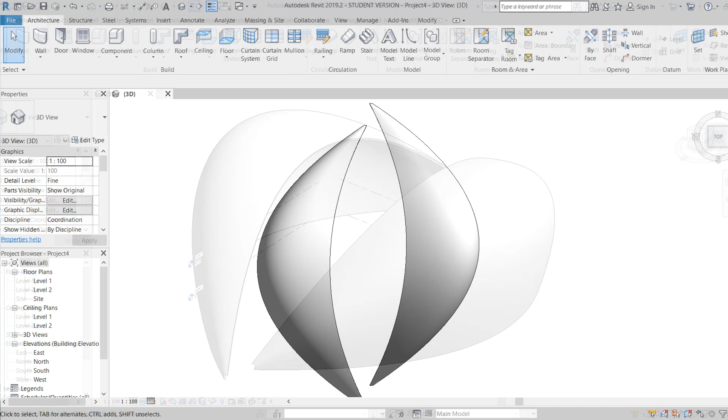The first thing I will do here is to open a new project. To do that, I go into the model and there is a new option here, and I just choose this default metric, so that is the millimeter template.

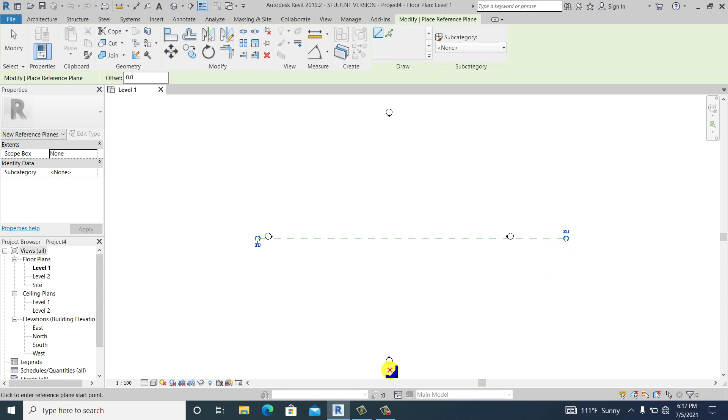Now what I'm going to do here is to set first my reference plane. In order to do that, RP for the shortcut. This is my guide and I name it into 1 just in case I need it, and this is 2.

Because this is an elliptical shape, I use the Massing & Site to model that one. So I just go into Massing & Site, show mass, select that one.

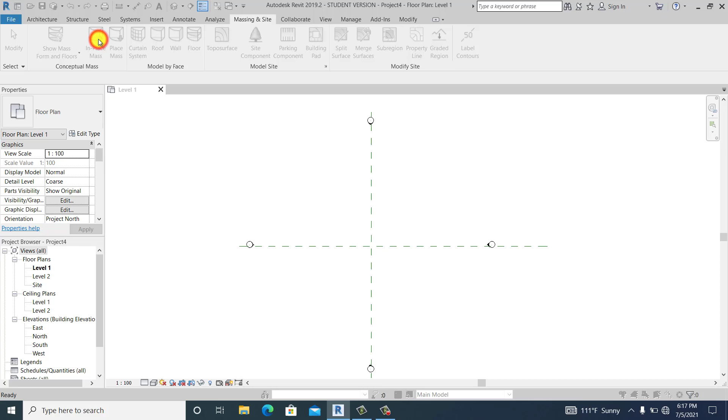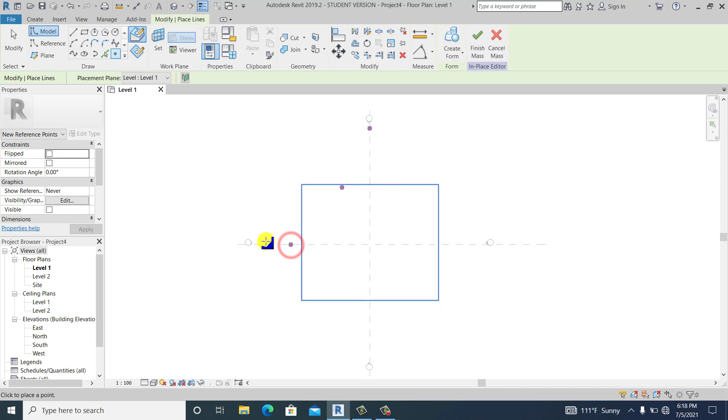In place mass, and I name it if you want, you can rename it by your own. Then I just choose this point element to start to draw that angle. I just simply place one point element here and one in the middle. Then I just select this, mirror it for the shortcut, to mirror it in the other side.

I prefer to use only 2 reference, so it's not complicated. To avoid confusion, that's why I put only 2 reference in this part, to make it an easy step and make it more faster to model.

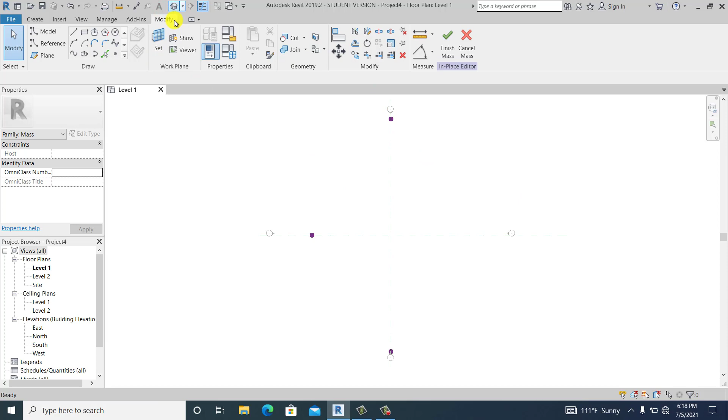Once you complete creating this, you can go automatic into 3D. Just select the house icon here at the top, then point. I select this point element, then go to set, then hit tab twice, then place 1 point in that part.

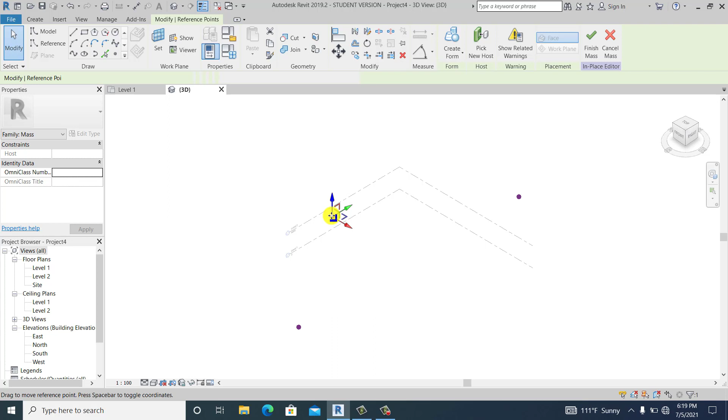So there is a pop-up there, don't worry about that one. I just simply select this, okay, and then I go here into the properties. Then I think 15 meters is enough for that one for now.

Then again, point element, then set, then place 1 point to that part. So my work plane is in this right location, or east location.

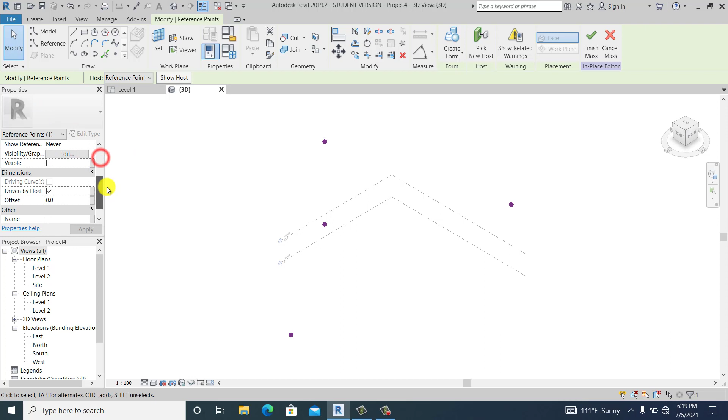I just simply select this point element, so that is the added one. Then go into the properties, and I think this is 10 meters even. So this is it already.

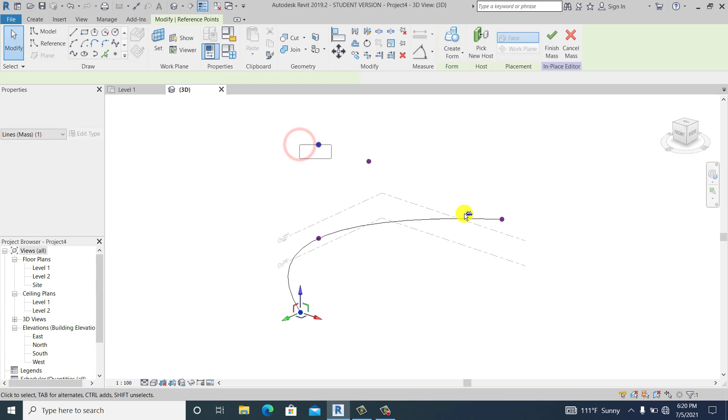What I'm going to do next is to select all these 3 bottom point elements. Then there is spline through points. Then these 3, I'm holding control and shift to add to the selection. Then go into spline through points, and I just repeat the process like this.

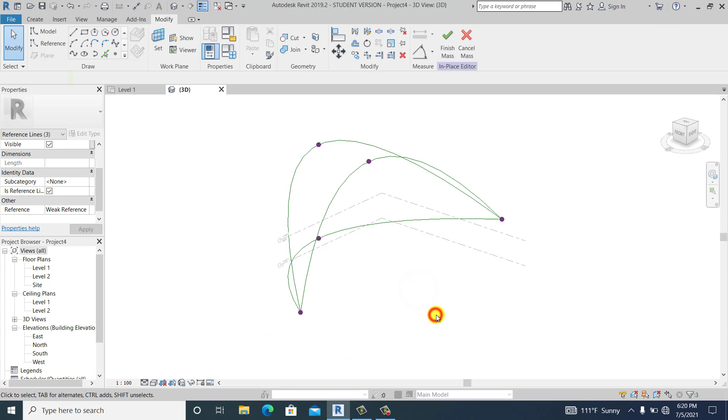Spline through points. Then I select these 3, and I set it all into reference line. So it's a very easy step. If you want to adjust it, you can move it together with the added one.

You can change it into 12 meters. By going here in this part, you can change it into 13 meters if you want. 13 meters, 15 meters.

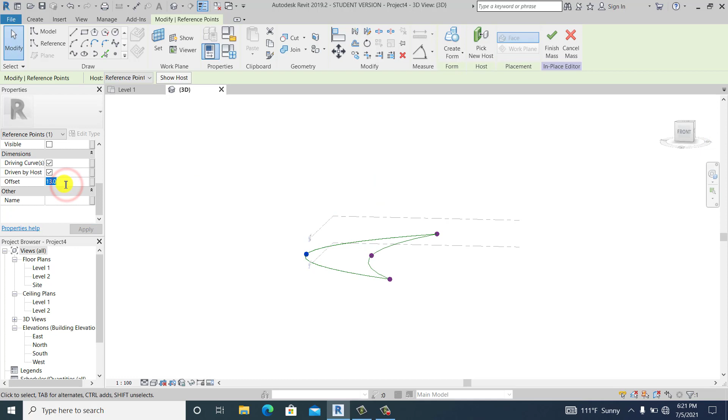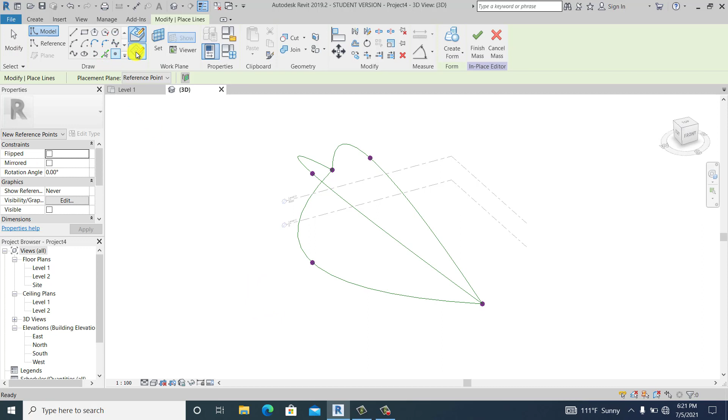So if you're happy with that, you can place now the other point element. In order to do that, I just simply go into the point element, then place 3 point elements in this 3 reference line. Then I just simply select this.

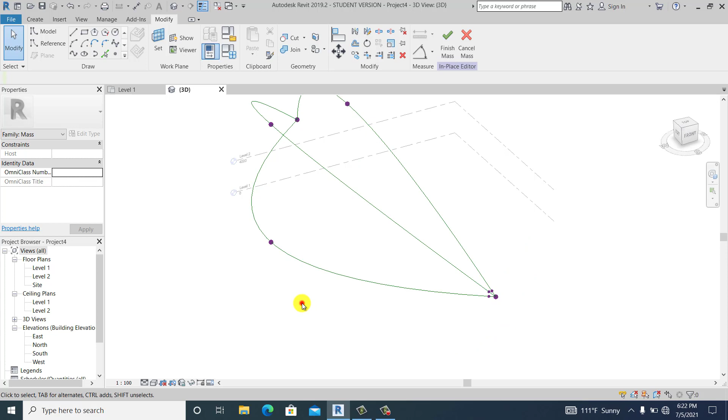Then I go into the properties, measure from beginning, 0.01. Automatically this 3-point element is adjusted from here. 0.01 is the dimension, or far from this main point element.

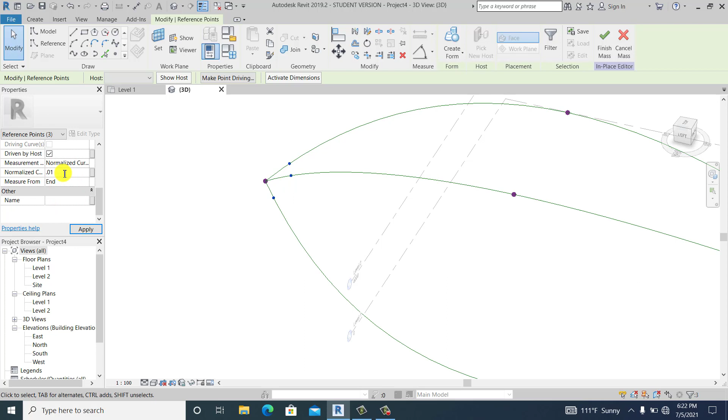Then in the other side, I do the same process. Select it all, then measure in the properties. I just set it to measure from end, and 0.01 is far from the existing point element there.

Then I just simply select this 3-point element, then spline through points, reference line. So I just simply repeat the process.

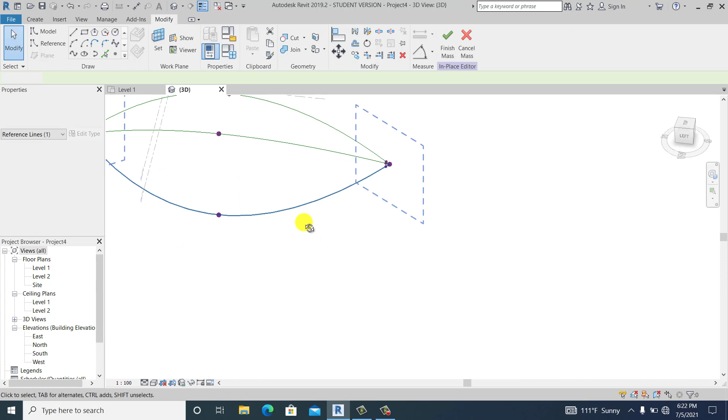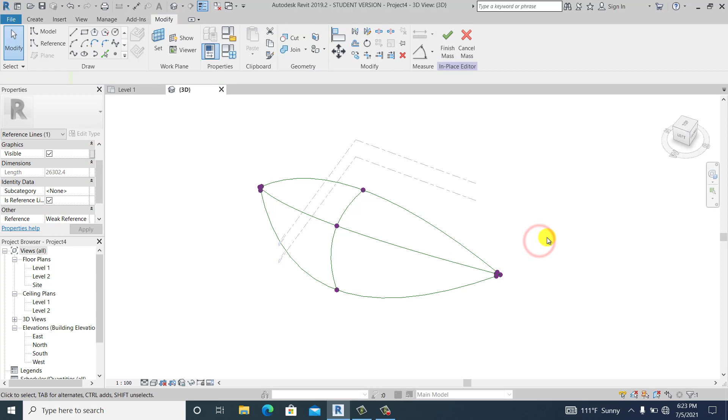So it's very easy steps. Now what I'm going to do next is to select all these 3-point reference lines, 3 reference lines, then go to create form.

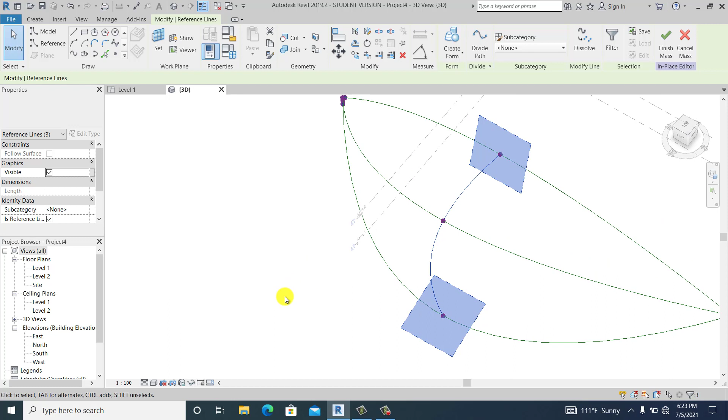If you change it into fine and realistic, this is what we get for that shape. Now what I'm going to do is, of course, we need to go out into the mesh, so finish mass.

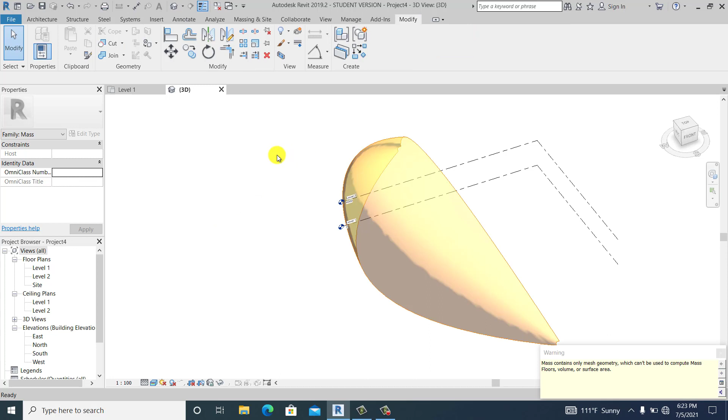Now I just simply place one wall to this curve or elliptical shape of the dam. In order to do that, always go to massing and site, because I started modeling with massing and site, so I use massing and site for that wall.

I just simply select this wall. Then I select this, and here there is an option, face exterior, face interior. But for now, I just simply choose the existing one, or default one. So I simply select this.

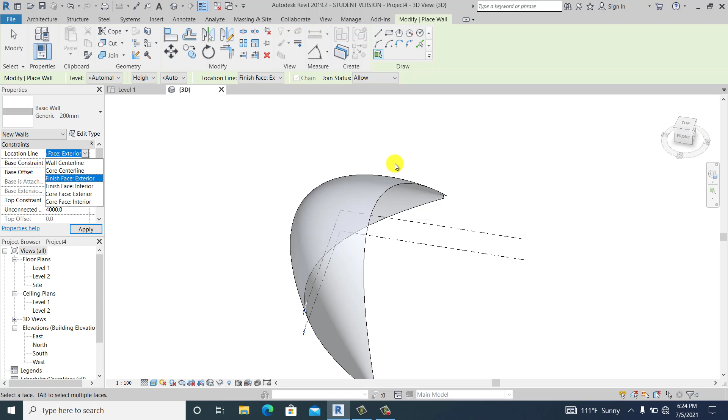Automatically it created a wall to that part. Then I can hit tab, or you can use the circle also, or the filter, to choose the selection if you want. So I go into edit type, or I just simply duplicate it first.

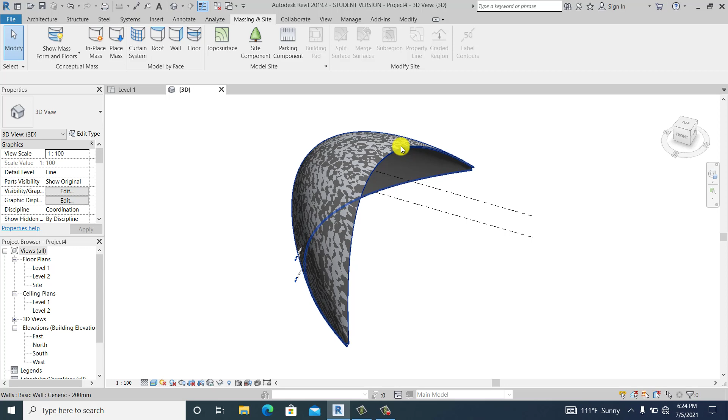Then of course we need to change the material to white. Choose this gypsum board and hit OK.

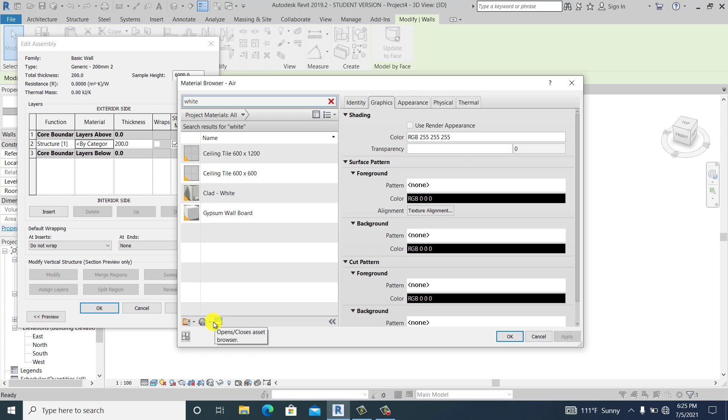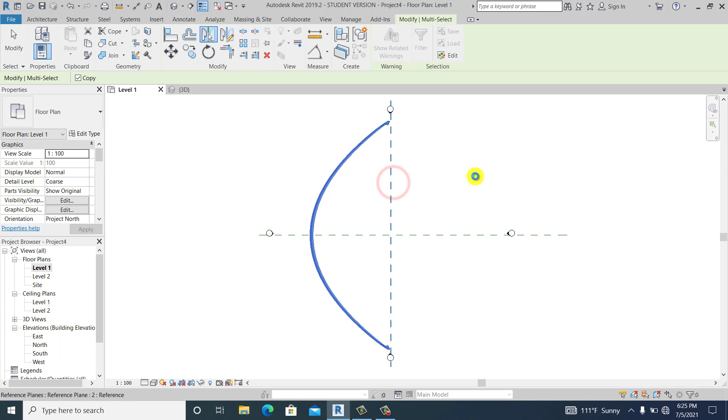Then I go to level 1. I just simply select this both, mirror for the shortcut, to mirror it in the other side. Then you can use your arrow on your keyboard to move it.

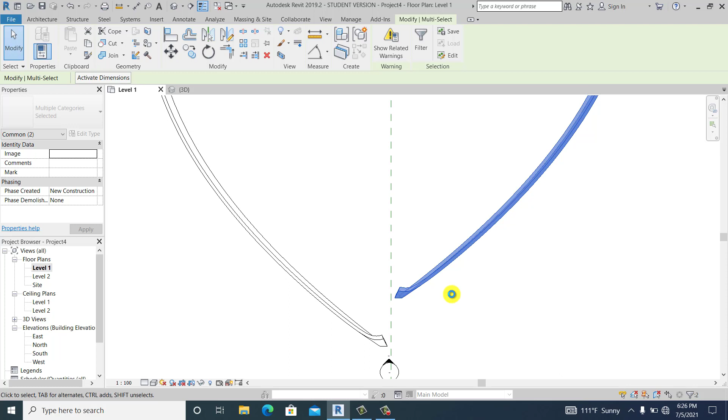I think even 4 or 5 meters from this one side. So I just simply move it like this. So this is the opening already, so you got the shape.

So if you go to 3D, this is what it looks like. I hope that everyone can follow the easy steps of what I did in this tutorial.